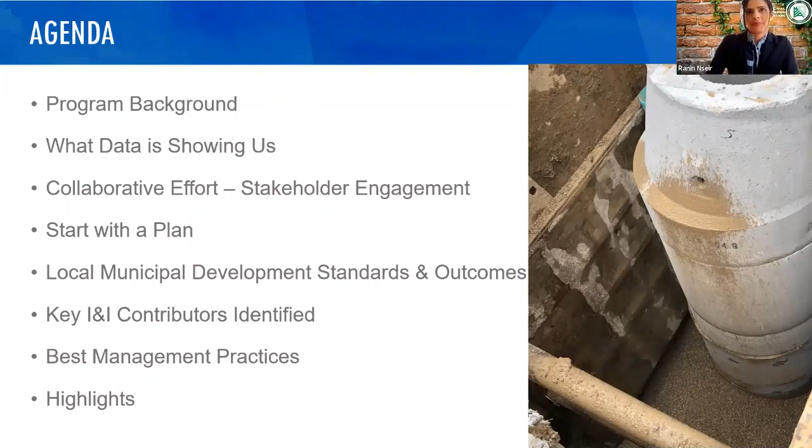So quickly, like I said, just a quick overview of the region. For some of you who may not be familiar with the GTA or with York Region, it is located in southern Ontario, surrounded by Lake Simcoe from the north, City of Toronto from the south, Peel Region from the west, and Durham Region from the east.

So you could imagine the amount of collaboration that we need to do for wastewater servicing within the region, since we are multi-jurisdictional, which requires a high level of collaboration between the neighboring regional municipalities and its 9 local municipal partners to manage its wastewater services. Regional Council guides our strategic vision of both the municipal and regional government who support each other in our work. And it's no exception for the I&I reduction program.

On top of that, following the province's approval for the condition of the Southeast Collector IEA back in 2010, York Region began collaborating with its 9 local municipalities to develop an I&I reduction strategy and an implementation program to meet these conditions that were put forward by the Ministry of Environment, Conservation and Parks, or the Ministry of Environment back then. A water and wastewater steering committee consisting of representatives from each local municipality as well as the region was also formed to guide the development of the strategy, as we needed to collaboratively come up with a long-term program for I&I reduction.

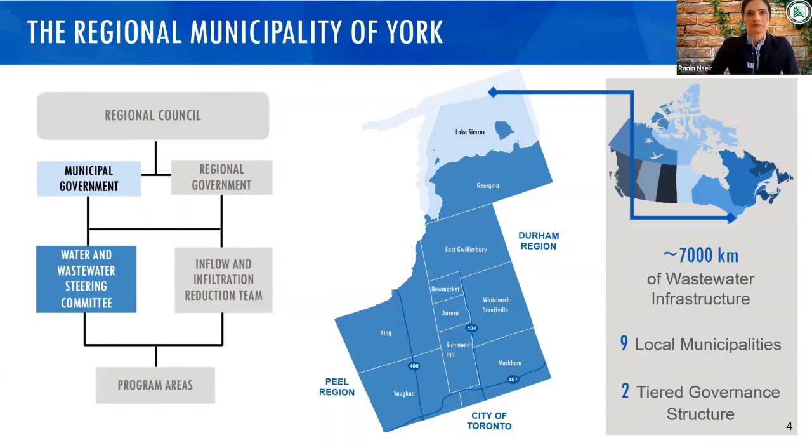The I&I program, since day one, consisted of 8 program areas that we continue to deliver on since 2011. And since that first submission, we were aiming to reduce peak wastewater flows at Duffin Creek by 10%, which, translated to I&I volumes, is about 75 million liters per day. That combined efforts between water conservation and I&I, with our target from I&I to the year 2031 being 40 MLD.

The main focus in the last 10 years has been on developing a solid monitoring and analysis program, which also included investigation and rehabilitation programs and projects in both the public and private side and in both regional and local wastewater systems. To date, the region has reduced close to 55% of our 40 MLD 2031 reduction target. So we still have some work to do. However, this has all been through collaboration, as you can see with the percentages shown on the screen, between regional, local municipal, and public-private partnership efforts.

Addressing I&I in new systems has also been closely investigated by the region since inception of the strategy, first through the development of the I&I inspection, testing, and acceptance guideline that we released back in 2011. And now through this project, we are looking at more robust I&I standards as we revisit that part of the program.

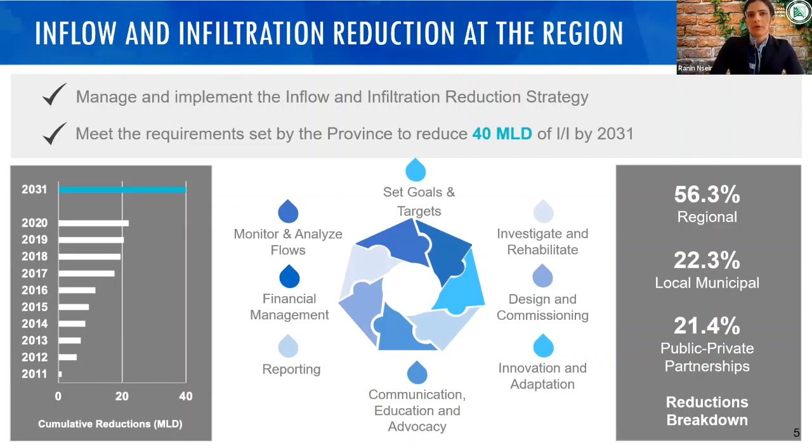Like I said, in 2011 we worked on developing this long-term I&I reduction strategy in order to meet the conditions put forward by the province. And it was unique to the region, maybe at the time. I'm not sure if anyone else would have had such a condition as the region's. This strategy was updated in 2016 because we are required by the ministry's conditions to update the strategy every 5 years. And since then, we are now working on our second 5-year update for submission later this year.

The region's I&I testing and acceptance guideline posted on our website outlines general procedures and minimum requirements for inspection, testing, and acceptance of new sanitary sewers in the public right of way. As part of the condition, we're also required to submit annual reporting to the ministry on both the region's and the local municipalities' progress in I&I reduction. And last year was our 9th annual report that we submitted and also posted on our website.

In addition to its collaboration with the local municipalities, York has been successful in implementing public-private partnership initiatives, which we call the P3 initiative, through two main programs: developer-funded agreements to reduce I&I in existing sewers, which we also call tri-party agreements, and our servicing incentive program for new development, which you might hear us call the SIP program. These have been extremely successful as well, in addition to our efforts with the local municipalities and the region on our programs.

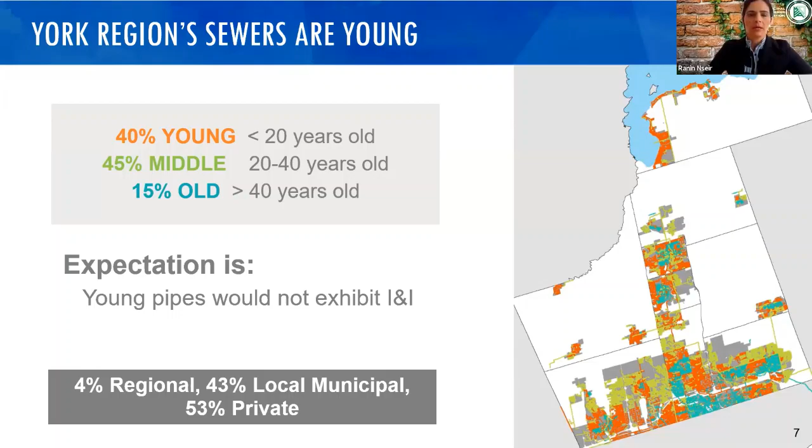So through the flow monitoring that we also have at the region, as some of you might know, we do have meters that are installed throughout the region system. We have over 350 monitoring locations across the region since 2013. And using that data, we wanted to take a closer look at what's happening possibly in those new development areas. So what the data showed us when we look at all those 350 basins that we have within the region, aside from the correlation that you see between pipe age and I&I, which I would assume is not surprising to many, where we were seeing increasing trends in I&I with pipe age.

For this particular exercise, however, we did want to zoom in on what is happening with those young and medium age systems that are 20 and 40 years old, and see how well they compare to the design allowances. So when we compared the figure, which plots the peak hour rainfall derived I&I against average sewer pipe age, it shows several monitoring basins in the young to middle age categories that are exceeding the typical RDII allowances for Ontario, which range between 0.1 to 0.26 liter per second per hectare.

So more specifically, approximately 24% of the basins with average pipe age less than 20 years old are exceeding the design inflow and infiltration allowance of 0.26 liter per second per hectare, and almost 94% are exceeding the tighter inflow and infiltration allowance of 0.1 liter per second per hectare. And when we include the pipes that are 40 years old, where you also do not expect I&I to reach its peak, we could be looking at 41% that are above that 0.26 liter per second per hectare.

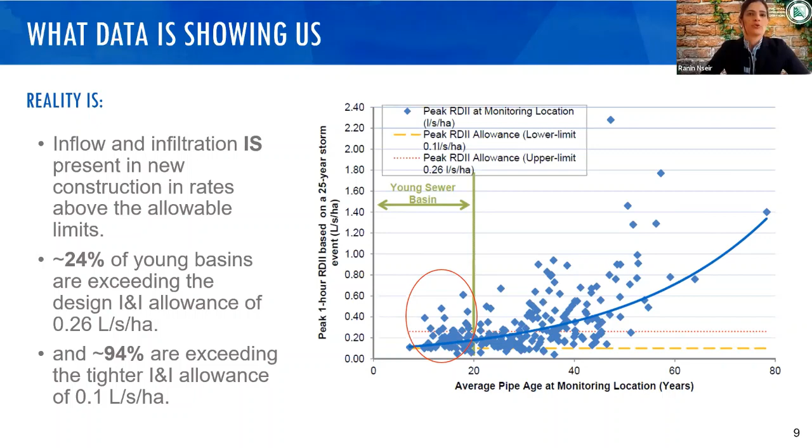So we were able to see that groundwater infiltration in a 10-year-old subdivision is probably as bad as in 50 or 60-year-old pipes. And when we looked at the correlation between dry weather flow and groundwater in a study that we did with our water resource team, you actually could see a direct correlation, showing flows that increase as trench groundwater levels increase. So something we definitely considered when developing the standard, which Joe will expand on, that we worked with the industry and material suppliers on, is that having materials based on constructability alone may not be enough to prevent I&I in new sewers.

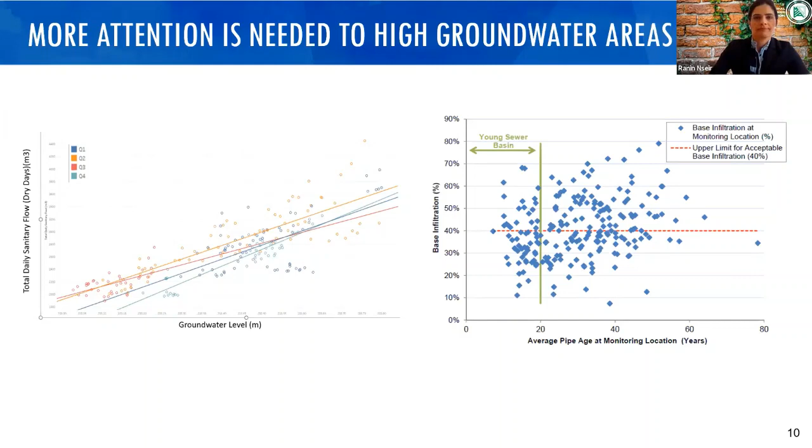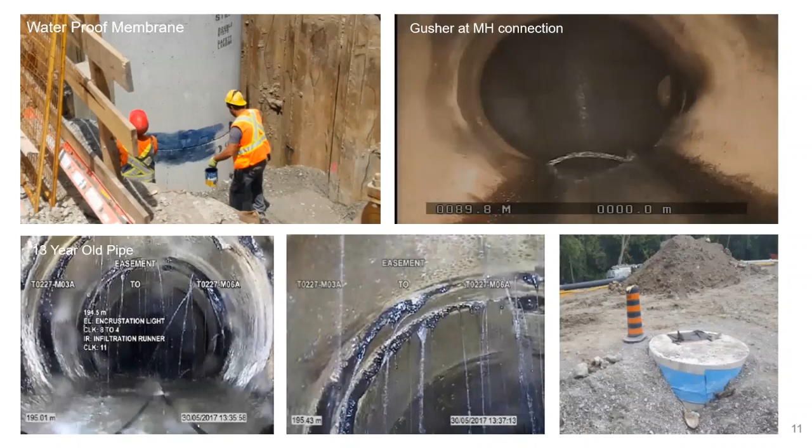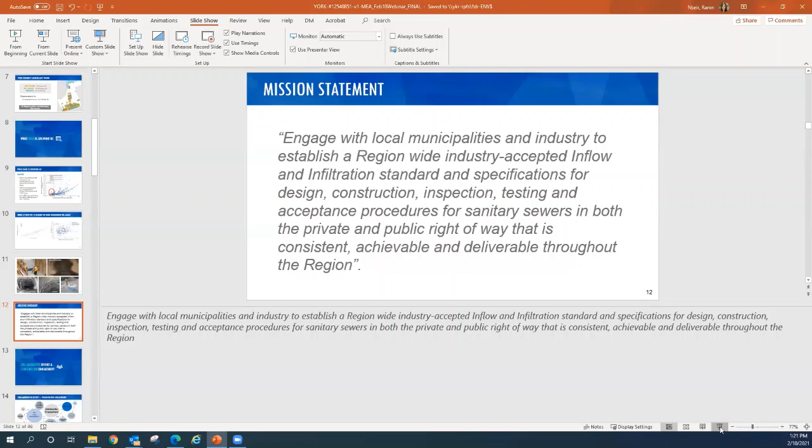Sorry to interrupt. It seems that your sound is cutting off a bit. Can you try to turn off your video feed so that it doesn't consume your bandwidth, and maybe the audio quality will improve? Thank you. Sure. Just 1 second. Because I'm in present mode, it's kind of hard to. Let me stop sharing for a second. Yeah, you can stop sharing, and if you hover the mouse at the bottom of the screen, you'll be able to see the stop video. All right. Okay, so stop that. I'll share again. Sorry about that. No worries. Thank you. Is it better now? Do you hear me better? Yes. Okay, thanks, Amin.

Thanks. So just where I stopped again, for developing a program or a project of this scale, we also had to see what is our mission for this project. What is our ultimate goal? And we found that this statement that we developed right from the get-go of the project is something that we looked at in the beginning, but we continue to keep reminding ourselves every time we try to fix something or do something with the project.

We keep using it, which is to engage with local municipalities and industry to establish a region-wide industry-accepted inflow and infiltration standard and specifications for design, construction, inspection, and testing, and acceptance procedures for sanitary sewers in both the private and public right-of-way that is also consistent, achievable, and deliverable throughout the region.

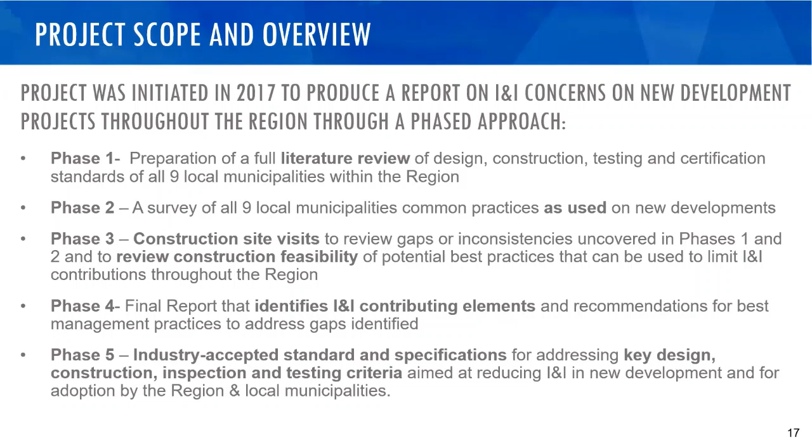Phase 5 is what we're presenting today, where Joe will expand on what we have developed in terms of industry accepted standards and specifications for addressing key design, construction, inspection, and testing criteria that are aimed at reducing I&I in new development, for adoption by the region and the local municipalities, and that are easy to implement.

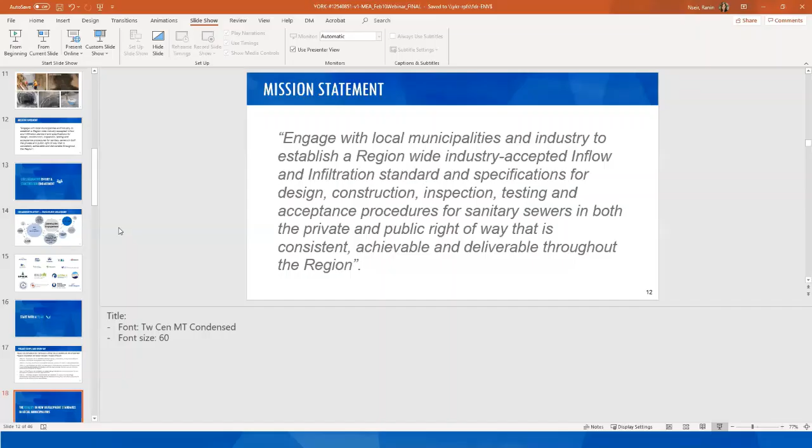I guess from here, I'm just going to pass it to Joe. Thanks, everyone. Thanks, Ranin. Let me just get my slide deck up here. For some reason, it doesn't ask me to. Oh, there it is. You got it? Okay. I got it. Let me just move this out of the way here. All right. Does everyone see the presentation now? Yes. All right, perfect. All right, thank you, everyone.

So thanks, everyone, for coming. I see we have a lot of people in attendance here. I know it's a bit of an interesting topic. I&I has been at the forefront for a little while now. So before I do my presentation, I just want to thank everyone that's involved here. Just to give you a little bit of feedback on top of what Ranin was saying, this project's been an 18 to 24 month process. Through that, we've engaged 5 to 6 different working groups, every working group consisting of 20 plus people.

So all in all, we've worked with all 9 local municipalities, pretty well all the industry partners, from the sewer and water main contractors and developers to the concrete and drain contractors that install the pipe on the private side, the Association of Consulting Engineers of Ontario, OCPA, the PVC pipe manufacturers. And it was a collaborative effort that involved well over 100 different industry specialists as we walked through and formulated a way to get this program going.

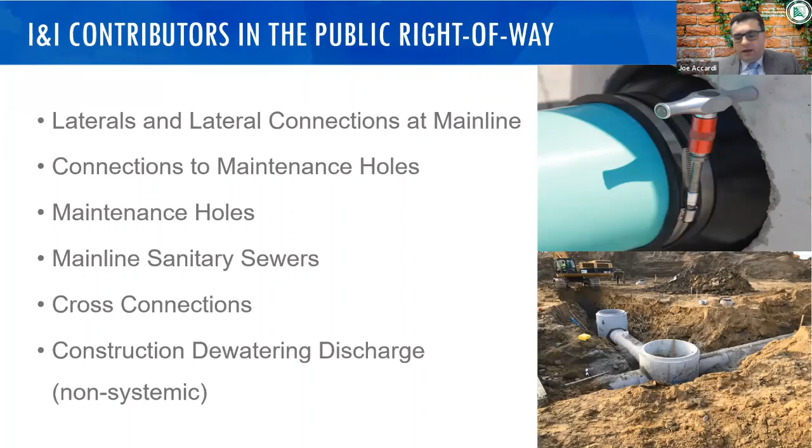And then the last thing we looked at is construction dewatering and discharge into the sanitary sewer in new developments. We tried to break it into systemic and non-systemic. As much as this is an issue during new development, it doesn't persist for long periods of time. It's just there to help with constructability and construction. Typically once the dewatering is stopped, we're not seeing that I&I anymore. So then we moved to the private side and looked at things happening there. So we looked at cross connections in the right of way.

So we looked through different standards to see in the private right of way what's going on. We're noticing that, and we'll get into it a little bit more, mostly everyone's color coding their pipe now. There's a little bit more separation now, so we're getting less and less of the cross connections.

But then we looked at the lateral connections, how the lateral's connected after it's terminated by, say, the sewer and water main contractor. How does that connection continue on into the house? That's definitely a source of I&I. We looked at cleanouts and test fittings, test tees, still persistently being used in the marketplace. Do they still have a spot? Are we noticing a lot of I&I in there?

And then two more general ones: we need to deal with contributors from site plans and infill developments that sometimes fall in a gray area where they deal with building code issues and non-building code issues. And we've got to deal with how we get to the next level when we're dealing with the gray matter, where we're dealing with development engineering for the municipalities, but there's still OBC technical issues that need to be resolved. And then same as the last one, construction, non-systemic construction dewatering.

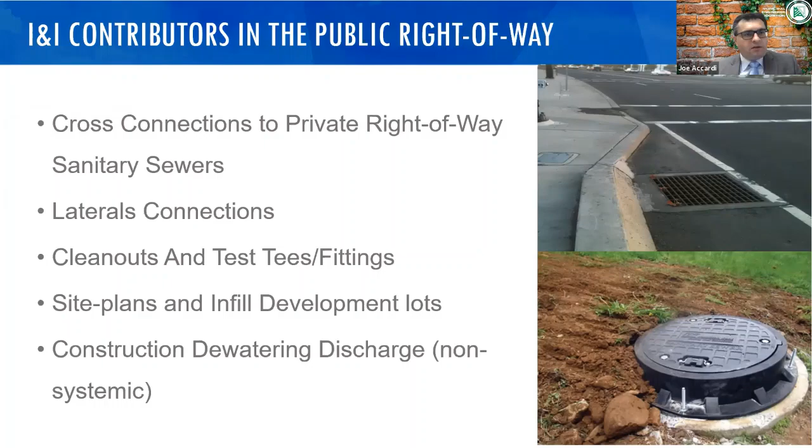So from our strategic planning session, we looked at what are the best management practices for new development. I'm not going to go through them all. I'm just going to go through a little bit of the theory of where we came up with some of these and how we developed them. And you'll see more of them as we come into the standard. But what we want to look at is how we can use some best management practices or things that work out there and use some sound engineering to develop best practices that can turn into a standard.

Well, the first thing we thought about is we talked to the industry, and the industry kept telling us that we need to have sound engineering. So we looked at associating sound engineering with great ideas and not having a system that has all the best bells and whistles and all the most expensive parts, and looking at what can really work, what works in our budget, but what's going to give long-term maintenance relief to municipalities. Because at the end of the day, when the developer's gone and the DC revenue's gone, this turns into a maintenance nightmare for the municipality.

So just because the developer is willing to pay a little bit more to put in a product that we deem is going to work, at the end of the day, 20 years down the road, it's the obligation of the municipality to continually maintain that. So we need to be cognizant of that as we move through it.

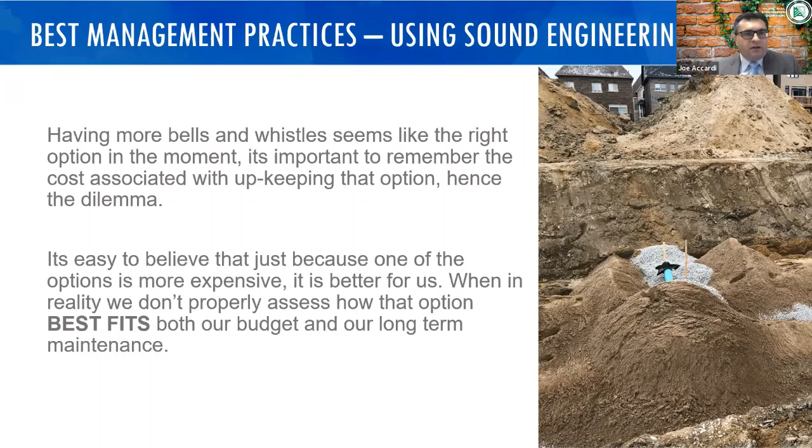So at the first meeting we had with the development community, I brought up this little car situation. The concept is simply that if someone's buying you a car, it's very easy to say, oh, I'll take the Bentley, please. But the problem is the Bentley has a lot of maintenance costs. Changing the oil is very expensive on this car, and you're going to have to do that in years to come. So is that the right solution, or can we look at something like maybe this little Mustang here that might be a little bit more sleek, but has a lower maintenance cost? It costs less to operate. And 20 years from now, we're not back at council looking for additional funding to maintain something that we probably really didn't need in the first place.

And to go on to Reneen's point, and I think this is what really stuck with the development group, we need to understand where the definition of young sewer comes from. And the car analogy is probably a good one for this. For the municipality, it's like you're buying a new car. The concept is that you expect in the first four or five years of owning that vehicle, the only maintenance you're going to do is some tires, maybe some brakes, but very little maintenance. You're not expecting to overhaul the transmission or rebuild the engine.

So what we're struggling with at the region is that when we look at some of the data and what Reneen presented, what the data is showing us is that five years in, we're overhauling transmissions, we're changing engines, we're doing jobs that shouldn't be done for another 5 or 10 years.

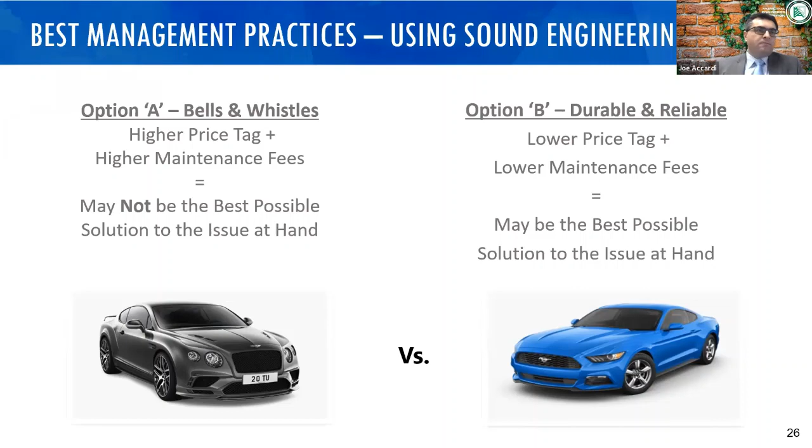So for the best management practices, as I'll get into the standard as we go, I just want to pose some of the questions we asked ourselves as we're sitting in a real group. So we sat there and we asked ourselves, are there actual standards in the marketplace right now that we can use in new development that always consider the impact of I&I? So are there? Do we need to do anything?

So obviously the answer is we need to really address some groundwater flows that are very persistent in new developments on certain sites. So that's where this discussion came into, that we looked at the graph that Renine presented before about groundwater effect on I&I, and we noticed that regardless of the age of the system, groundwater affects and impacts I&I instantaneously in the sewer. So how do we deal with things like that?

Then we broke it into installation stuff. Are there any techniques that can be used in the field, construction techniques that can effectively help us to reduce I&I? Testing and inspection. So what we did too is we looked at all the local municipalities in the region, and we looked at what type of testing and inspection is being done on new developments, and we looked at ways that we could deal with enhancing the testing standards. We looked at what's being done on capital works type projects versus what's being done on development projects, and why there is sometimes a differing of opinions on how these projects are being inspected and tested.

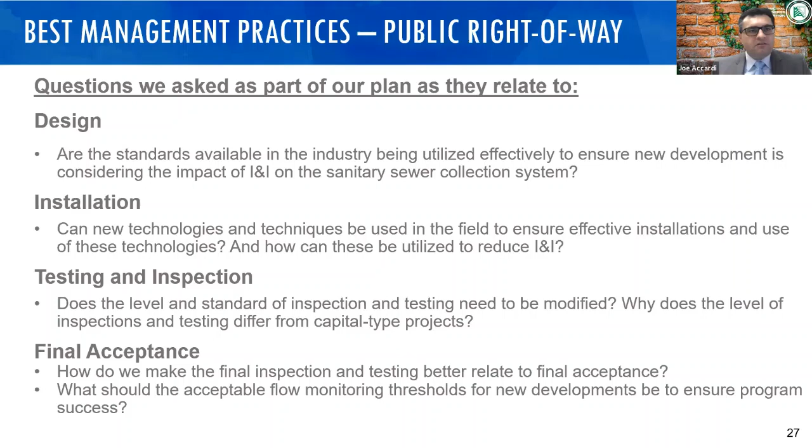Then on the private right-of-way, which tends to be a bit of a gray area, as we look at raw data at the region, we are noticing that there still is a substantial amount of both RDII and groundwater infiltration that's coming in on the private side. So how do we deal with that? So we looked at some design stuff. We looked at things in the OBC that we can work with. Are the detailed drawings coming from the consultants working for the developers detailed enough to provide guidance on where the lateral connection is going to be and how that's going to be worked?

Do lateral connection details need to be tested? How do we test them? And is the test tee that we've been using in the marketplace for 20 plus years still effective? Are there technologies in the marketplace today, like CCTV testing, that can outdate what we typically did in the past to see where the property line is?

Then we looked at installation. We looked at really going out in the field and looking at what's happening in the field. We're looking at giving more room for the concrete and drain people. So can we move laterals? Can the sewer and water main contractors install the laterals, say 1.5 meters beyond the property line, so it gives more access to the concrete and drain people? Is it going to be less effective or more effective?

How do we reduce the closeness that's going to happen to all the utilities? Typically in new developments, the sewer and water main goes in, then by the time they build the houses, there's a series of utilities that get installed. So how do we keep a little bit of separation and make it easier for them to work in there? Maybe that can help reduce some of the joint failures that we're having.

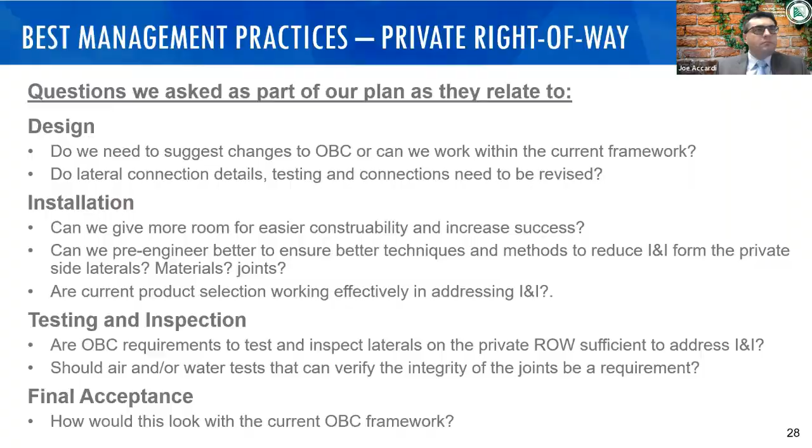So a little bit of the highlights of our standard. So we broke our standard into basically 4 sections. We broke it into areas that deal with design and construction related standards for all public and private right of way. Then we dealt with inspection related standards. So, requirements, things in the inspection requirements or new manuals that we need to deliver better inspections or more effective inspections. Testing related standards.

So when we went through the local municipality standards, we noticed there's a bit of inconsistencies with when tests are being performed, how they're being performed. So we want to streamline and standardize the testing. So that'll be discussed in that section. And then finally, flow monitoring related standards, how we deal with flow monitoring, how we deal with data we collect during flow monitoring, and what that data is going to tell us on whether or not our system is actually effective in reducing I&I.

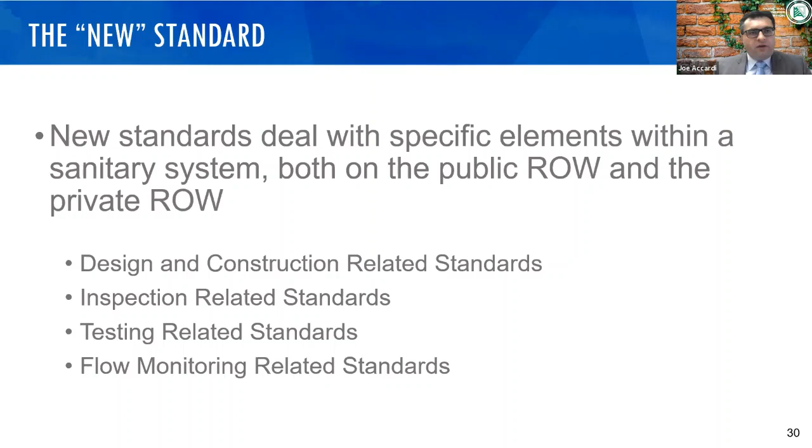Well, what we're finding is a lot of municipalities typically change the side diameter based on the diameter of pipe. They change materials. So 450 and above, they'll change to concrete. There's no rhyme or reason. So we did some investigation. We tried to figure out, typically, are there more issues with depths there? Are the depths working? Are the concrete pipes actually providing resistance to any groundwater issues?

So what we did is we developed this table or flow chart that could be used by the developer's consultant, so that they walk through the results of their hydrogeological assessment of the site and it helps them to understand what type of pipe materials can be used. Now, I know some of the other regions or areas around the province are going straight to, okay, well, if you have groundwater, we go straight to CPP, concrete pressure pipe. It's a great idea, but we're trying to skin the cat a little bit differently here.

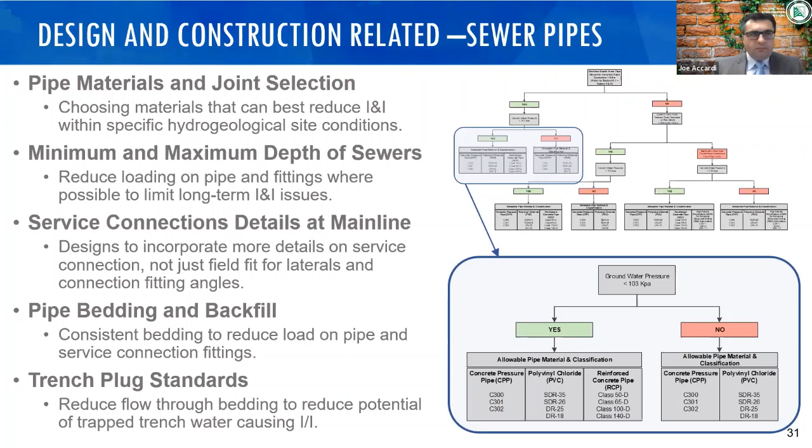Not today when the groundwater replenishes, or when we have, say, issues with the groundwater table, but in the future years when the parging might come apart, or when things like that tend to happen, it reduces maintenance costs. So a couple dollars spent more looking at resilient connectors and the way we waterproof now might be substantial cost reduction for maintenance in the future. So things like that we're looking at.

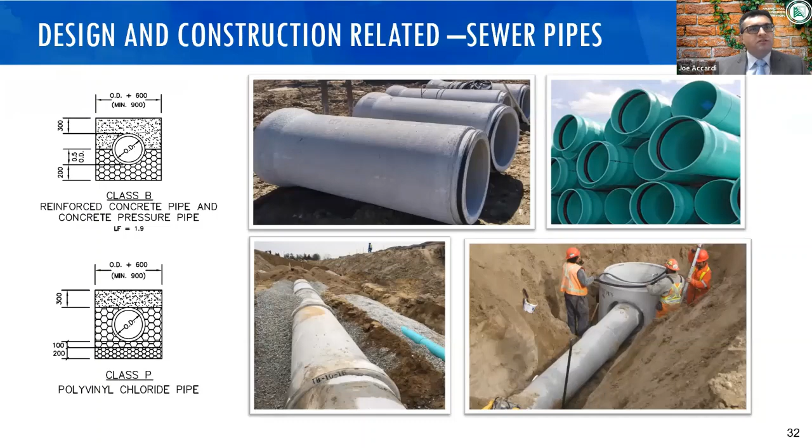So when we're talking about maintenance holes, this has become a bit of a concern. There's quite a few maintenance holes. So we're looking at some different things in the standard that we've proposed at the 90% stage. We're looking at increasing spacing on certain manhole runs. So if you're having a larger diameter transmission main, typically in the municipality's development standards, it doesn't really change too often. They typically keep the same spacing. Whereas you look at, say, a regional trunk type system or methodology, we tend to see different spacing, increased spacing when we get to larger.

So we looked at CCTV capacities, we looked at flushing capacities to develop what could be the maximum minimum spacing that could be used, that we can maybe minimize or reduce a percentage of manholes where we're still seeing a substantial I&I, and not be detrimental to the maintenance costs in the future. So that's what we're looking at.

It wasn't just an idea. We called multiple CCTV companies and multiple flushing companies to see what their maximum minimum capacities are. Everyone's pretty well in the 300 to 350 meter range. So we looked at ways to change the maximum spacing so that we're within the available technology, but maybe we limit a few of the maintenance holes.

Then the connection details, like I said, we want to eliminate I&I by increasing the specifications for connection details, putting in water stops, waterproofing, trying to eliminate I&I at one of the most critical spots, the connection between the pipe and the maintenance hole.

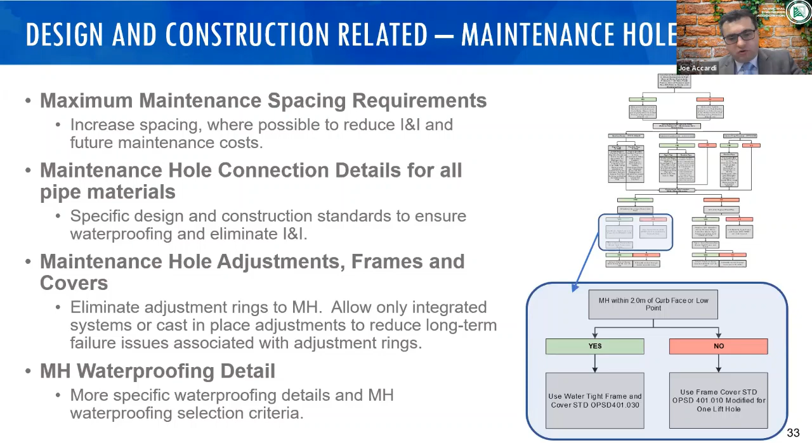And then finally, we dealt with specific waterproofing details, how we provide waterproofing on maintenance holes, protection boards. We've noticed on multiple sites, we did some trials, that if we don't have a substantial amount of protection board, we tend to lose the effectiveness of the waterproofing. So we've worked hard to put together a detail to allow for a protection board, and you'll see it in some of the images moving forward here.

So we looked at technologies in the marketplace that are available. We looked at, say, DeCast has the IFC product, and some of the other competitors to that, and how we can implement that into the standard for new developments to reduce this type of differential settlement and sources of I&I. As this settles, it puts strain on the modulock, and we continually see I&I when we CCTV the manholes 5 or 10 years later during our inspections.

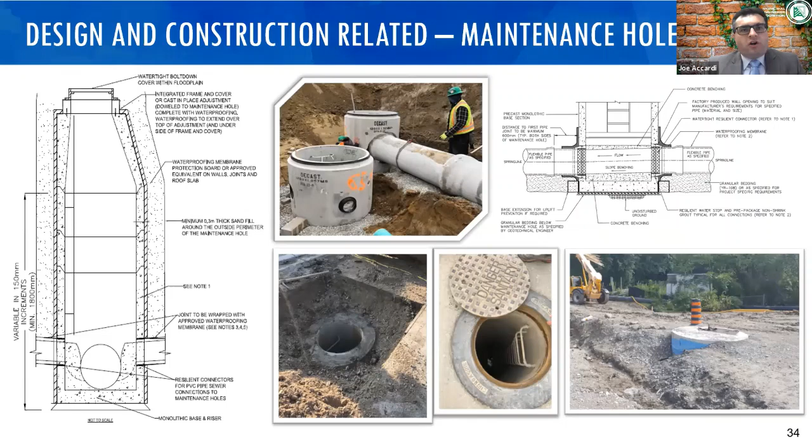So we need to look at new technologies that are available, and that's what I'm putting in here. We spent 4 or 5 days on different sites trying to see whether the IFC type system, the Bibby product, or any of the competing products actually work and how they work. We've seen some great success with that, so we've implemented that into the standard to say that municipalities should start looking at different alternatives to reduce grade rings.

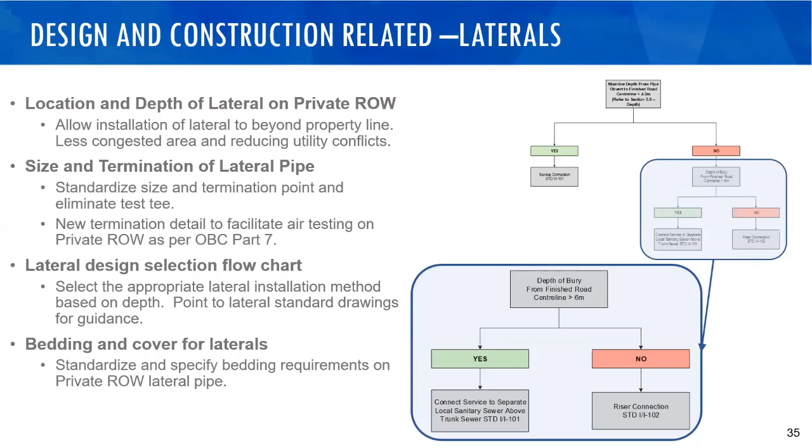So then finally, we looked at laterals. So the biggest issue with the region is that a lot of local municipalities really didn't have very specific lateral design methodologies. And we looked at spots like, say, Durham. Durham has 3 or 4 different lateral connection details that walk you through what happens if your lateral is greater or less than 45 degrees. How do we deal with that?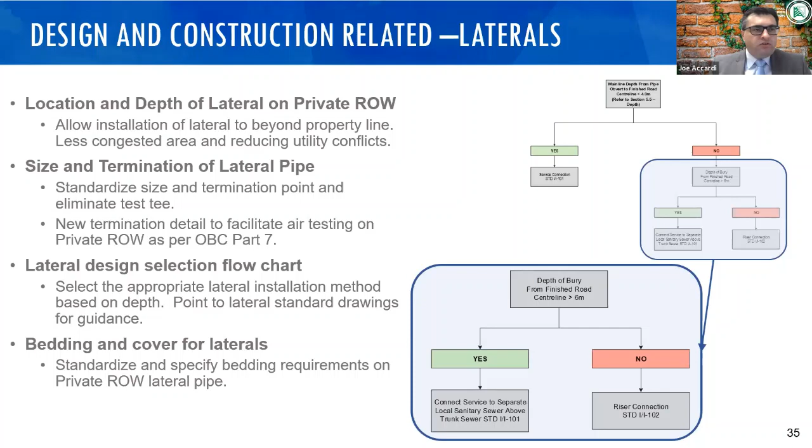So we have that so that through this flow chart, it allows a designer to pick and choose the right standard and points to the standard they need to specify in their drawings of what they're looking for. And this is what typically it looks like. So we have a type 1 and a type 2 for different angles, one with a sweep, one without a sweep on regular, say 45-degree installations. And then we have situations where we have a riser piece.

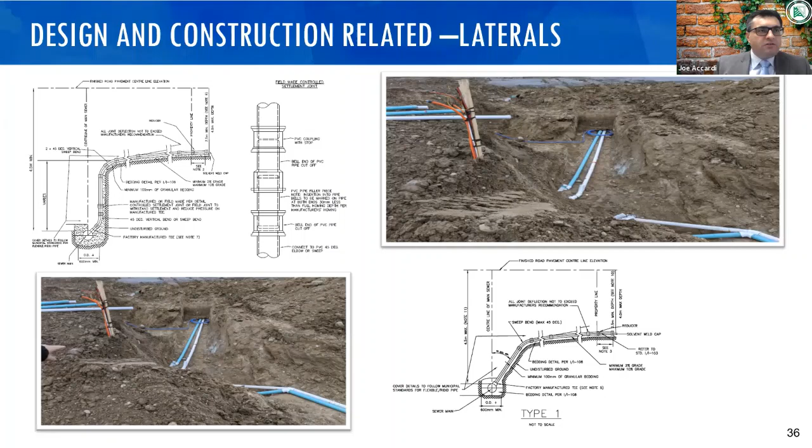So we have some alternatives. We have controlled settlement joints and non-controlled settlement joints. So some different options we gave to contractors to reduce the loading on the fittings. But the main thing here is we're trying to keep the fittings at the 1 or 2 o'clock. We're trying to maximize the flow in the sanitary sewer, so you don't need to upsize it. If we go to, say, a 9 o'clock or 10 o'clock position, we start to see reduction in the capacity of the sewer. So we're trying to maximize the sewer capacity, but dealing with the loading.

So we're looking at testing. We're looking at more stringent CCTV testing. We're looking at whether or not testing of CCTV from the property line to the building face actually provides us information that we need to ensure I&I is being reduced. So we found that air pressure testing is a lot more effective for that, because if you have groundwater issues and the site's being dewatered, it's very difficult with just CCTV to notice whether or not your joints are holding.

So in the building code, Part 7 allows for laterals to be air pressure tested. Like I said, 35 kPa for 15 minutes. There's really no design methodology or specification, it just says it needs to be tested. So we developed a standard to try to deal with that with our OBC partners.

And then finally, we're looking at the mandrel test. So typically the industry goes with, say, 7.5% deflection. We're looking at working with the geotechs to reduce the mandrel testing requirements to 5%. So we get a little bit less deflection on the pipe, which will hopefully reduce the deflection on the joints and reduce infiltration coming in from many joints.

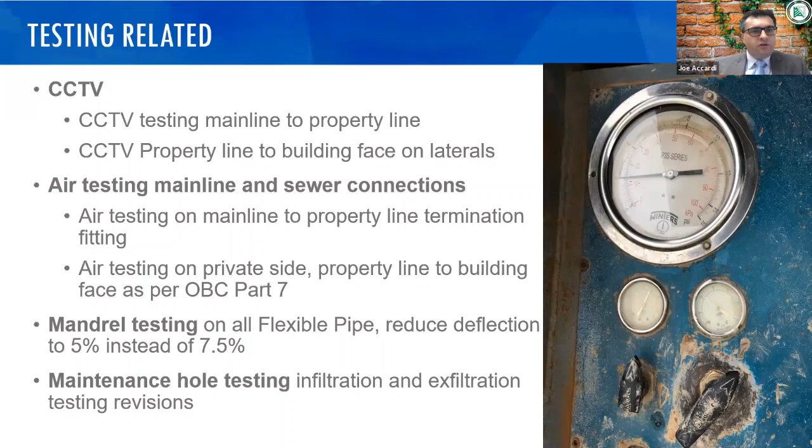And then lastly, we added some new and specific technologies to maintenance hole testing that's going to allow us to do infiltration and exfiltration testing on all maintenance holes. So I'll show you some quick images of this. The little picture on the far right is something we played with on a couple sites in King. So we took the TY, and that one has a branch on it, but since then we've taken the branch out. So there's no longer a branch and it's no longer gasketed. We have a screw-on cap.

So what we do is, if you can see on the far left, the concrete and drain contractor would then use that TY to put the bladder in and inflate the bladder. That'll allow us to test that one joint. And then once we test that one joint, they would have a cap or put another bladder in the clean out inside the building foundation or inside the building. So that allows us to check all the joints on the lateral.

Another thing we've done is we've replaced the test fitting with the reducer fitting, something where we found major inconsistencies in the marketplace. Some municipalities have a 5-inch branch, some have a 6-inch branch, but then the concrete and drain guy doesn't really know what size it is. So we're trying to eliminate that. We're having the sewer and watermain contractor install the actual reducer to 4-inch pipe and put a 4-inch cap so that we have more consistency moving forward.

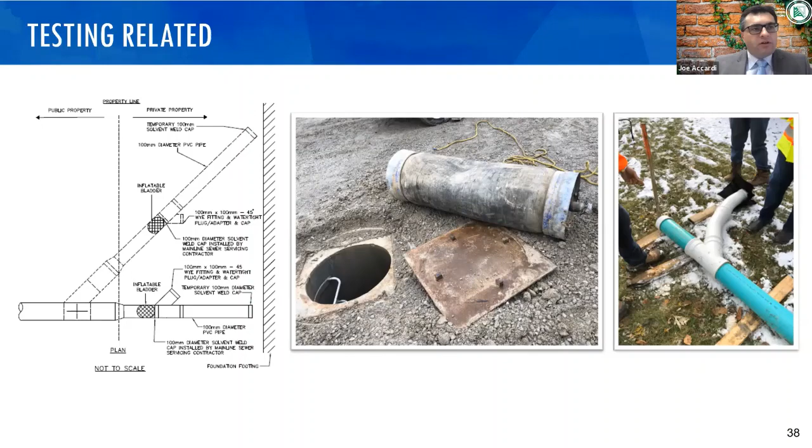And finally, I'm just going to skim through some new inspection standards. What we did is we took standardized inspection reports that we typically see on York Region capital delivery projects. We amended them slightly, and we're going to use this moving forward so that the developer's consultant has a guideline or checklist on how they can do proper inspection and daily reports that can be handed to the municipality and tied to release of LCs and final assumption.

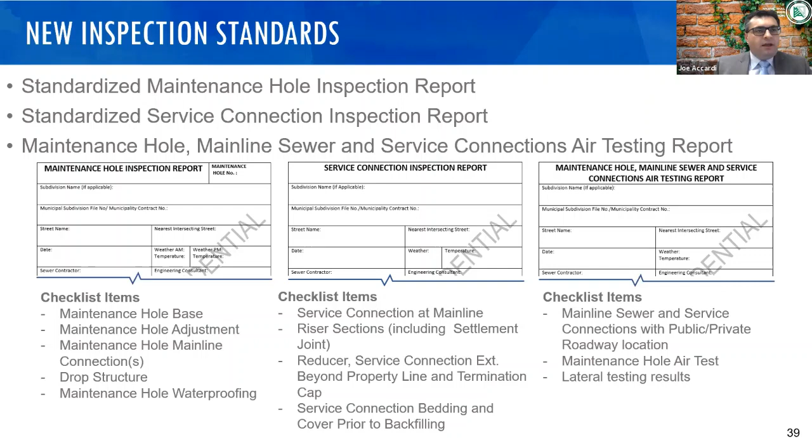So last slide, I think we got to the end here, is flow monitoring. The current issue with flow monitoring is that we need to standardize the technology a little bit. We need to standardize the reporting. Currently, we're using a rate-to-rate relationship, like a rational method, where we're looking at how effective that is on sanitary sewers. Is it effective? Is it actually helping us build watertight systems? Is it actually telling us whether the system is watertight? So we need to figure out how we can deal with that, and that's what we're working on right now.

Then we want to work on standardizing the methodology so the data that is being generated is more consistent. So when it gets to the region, it's not pushed around, and the region can easily look through the data and move forward with it, so the developer gets answers quicker. We can deal with seasonal considerations. We can deal with not having the same issues for different sizes of developments. So we're not looking at it based on hectares. We're looking at whether there are ways we can use the size of development or the percentage of occupancy to tie it to the flow monitoring, so we're getting more consistent data that's not going to skew the numbers, so we're getting the right types of data we're looking for.

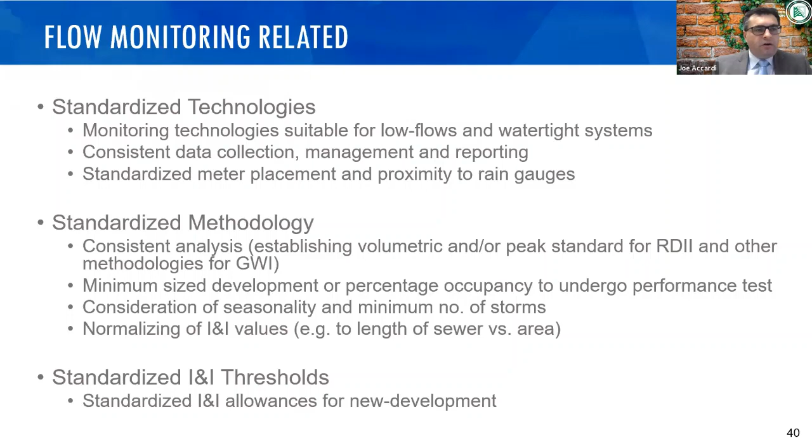And then finally, the last thing we're doing is we want to standardize the allowances and thresholds for all new developments. So regardless of where you are or what developer you're working for, the thresholds that will be assumed in your flow monitoring will be consistent throughout the region. So we have a consistent understanding whether or not the elements we're putting forward in this standard are actually giving us the type of I&I reduction that we're looking for.

So next steps, just the last two slides here. Next steps is we're going to finalize and release our 100% submission. We're going to adopt the standard and deliver an implementation plan on how this will be rolled out. Then finally, once we get all that, the new standard will be rolled out. And the region currently is working on revising their SIP, which is their allocation program. So we're working with the region on how SIP can work with this new program, and once we roll out this program, will SIP still exist? Will SIP not still exist? Or how do we deal with the two working together?